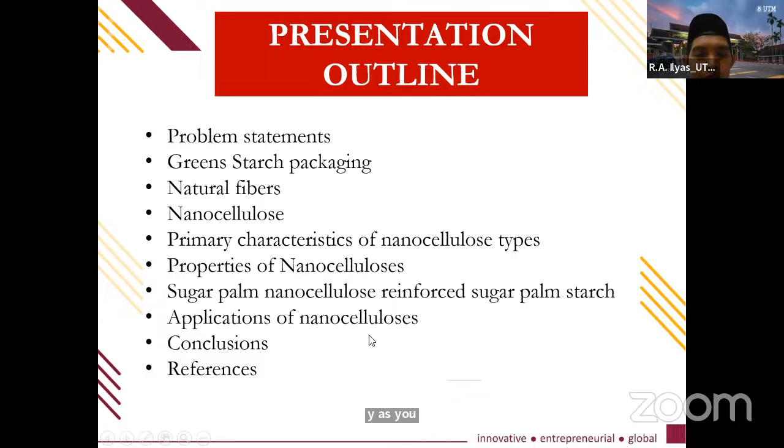This is my presentation outline, starting with a problem statement, then starch packaging, natural fiber, nanocellulose, and then primary characteristics of nanocellulose, sugar palm nanocellulose, reinforced sugar palm starch, application of nanocellulose in food packaging, conclusion and reference.

One question before I start the presentation: if one bottle of water is thrown into the sea, how long would it take to fully decompose? It will take 450 to 1,000 years to decompose.

Currently, the plastic industry uses petroleum-based synthetic polymer.

This is a mountain of plastic bags thrown in the landfill. The problem encountered is this plastic is non-degradable and non-renewable in nature. This figure shows 'don't trash where they splash,' because this turtle might think that the plastic is a jellyfish.

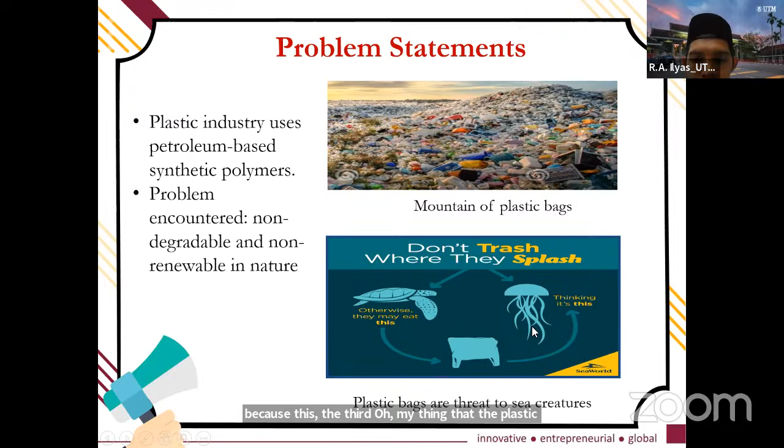How to overcome this problem: one method is we change synthetic based plastic, or petroleum based plastic, to starch biopolymer due to its availability, biodegradability, and renewability.

The starch-based film for packaging has been reported to have low water barrier resistance. Although starch can be one solution for the degradation problem of synthetic plastic, it has drawbacks: first, low water barrier resistance, and second, poor mechanical strength.

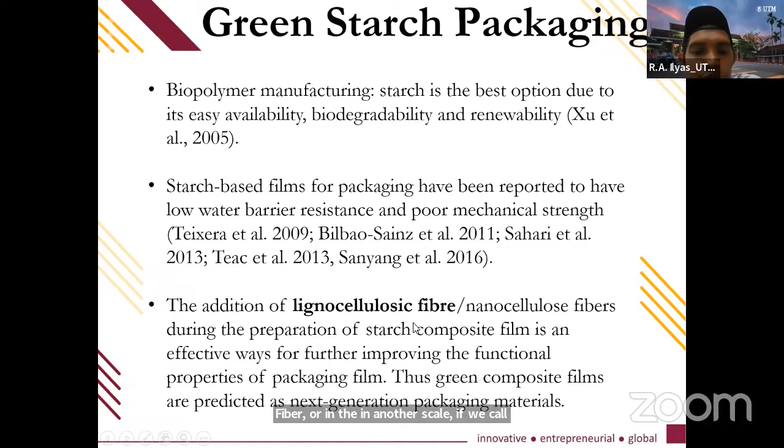In order to improve these drawbacks, we include lignocellulosic fiber, or in the nanoscale we call it nanocellulose fiber. This is a component of the biocomposite - it can be a combination of fibers and polymer.

Natural fiber can be obtained from any source, such as plants and animals. However, for this presentation, I will focus on lignocellulosic fiber.

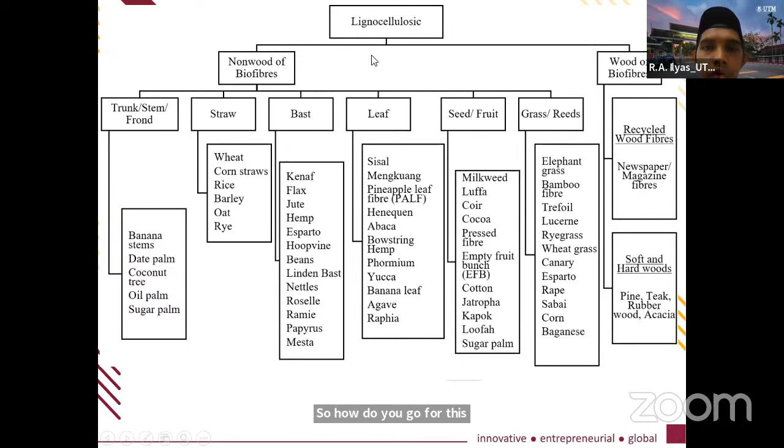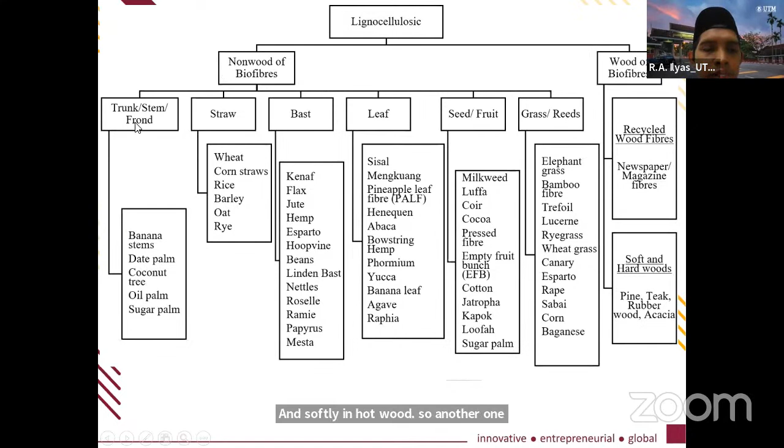Lignocellulosic fiber comes from two sources: non-wood biofiber and wood biofiber. Wood biofiber consists of recycled, softwood, and hardwood. The non-wood biofiber includes trunks, straw, bast, leaf, seed, and grass.

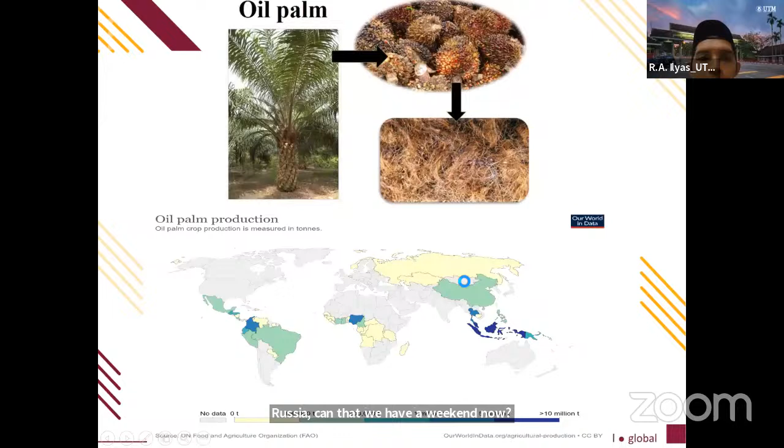This is some example natural source fiber in Malaysia, such as sugar palm, coconut, cocoa pod husk, betel nut, sugar cane bagasse, banana, pineapple, oil palm, roselle. All these fibers can be reinforced with starch to improve the mechanical and water barrier properties.

Going to the nanoscale, the nanoscale of natural fiber is nanocellulose. It can also be nanolignin, but for this presentation I will focus on nanocellulose.

Nanocellulose has a nanostructure of 1 to 100 nanometers in diameter and tens to hundreds of nanometers in length, so it's called a nanofiber.

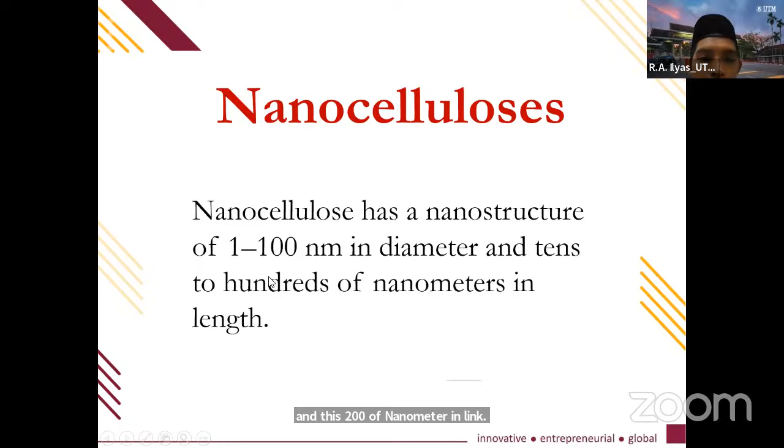For example, we can use soda pulping, acid and alkali pretreatment, and then cellulose isolation. Lignin was removed using sodium chlorite, and hemicellulose was removed using sodium hydroxide. After that, we get cellulose.

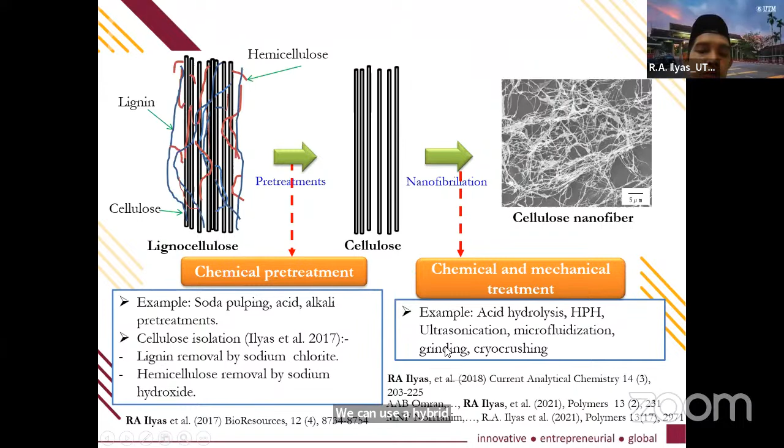We can extract the nanocellulose using chemical and mechanical treatment. Some examples: acid hydrolysis is an acid treatment. For mechanical treatment, we can use high pressurized homogenizer, ultrasonication, microfluidization, grinding, and cryo crushing. I've published several journals regarding this method to extract the cellulose.

This is the primary characteristic of the nanocellulose.

So currently we have 3 types of nanocellulose. However, from the plants, we have 2: nanofibril and nanocrystalline. So what is the difference between nanofibril and nanocrystalline?

It's the size of the fiber. You can look at the length. The length for the nanofibrillated is below 1 micrometer up to 10 micrometer. However, for the nanocrystalline, the length of the fiber is almost up to 100 nanometer. So there is a difference between the nanofibrillated and nanocrystalline.

So you can imagine the shape of the nanofibrillated and the nanocrystalline. Crystalline looks like rice. However, for the nanofibrillated cellulose, it's noodle-like.

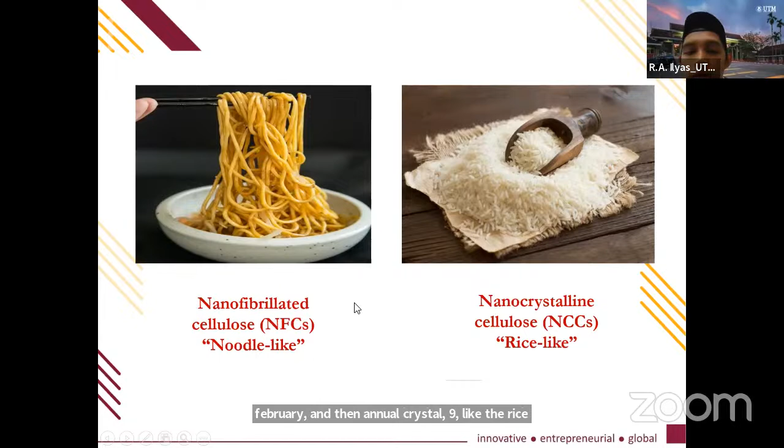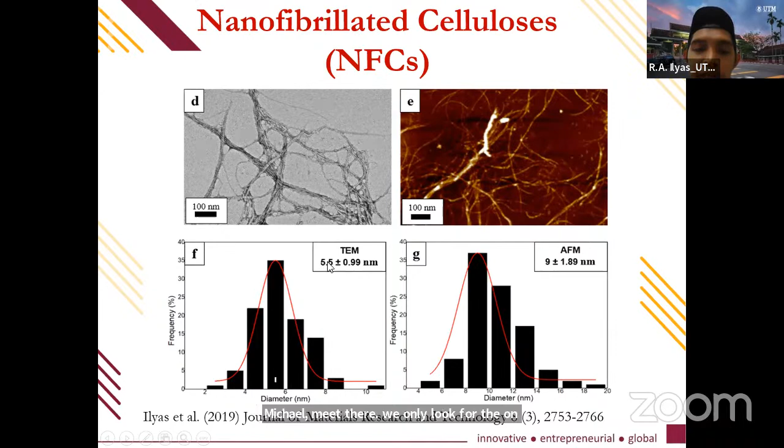And then some of the properties of the nanocellulose explain why we should reinforce it with starch. First is the high surface area, high aspect ratio, high crystallinity, low density, high mechanical strength, high tensile.

It's renewable and available as long as it is plant, and you can extract the cellulose from it. It's biodegradable, biocompatible, has high thermal stability, and besides that, it has an abundant surface of hydroxyl groups, which we can modify to reinforce with other polymers, and it's less toxic.

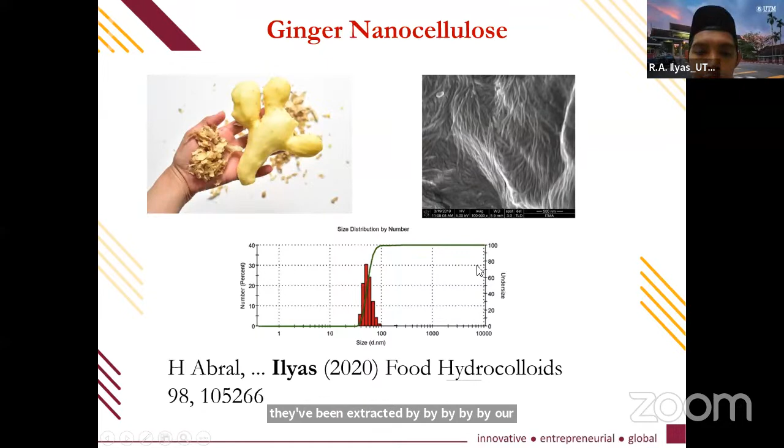Okay, this is the type of nanocellulose that have been extracted by our team. This one is ginger nanocellulose, then water hyacinth cellulose, kenaf cellulose, sugarcane bagasse nanocellulose, and agave gigante nanocellulose.

This one is out of scope, but still this bacterial nanocellulose can be reinforced with starch to increase the mechanical properties.

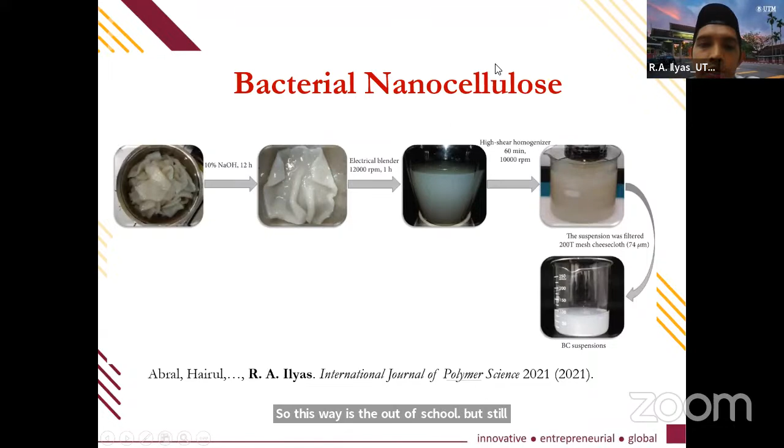So this one is the project for sugar palm nanocellulose, in which we extract the nanocellulose as well as the starch from the same tree. This one is the starch. This bioplastic starch, thermoplastic, can be used for food packaging.

Sugar palm starch, from the sugar palm fiber, can extract and become cellulose. After that, isolate the nanocellulose using chemical treatment. We get the nanocrystalline cellulose, and with mechanical treatment we can get the nanofibrillated cellulose.

So this one is the sugar palm nanocellulose reinforced with sugar palm starch. We can see that when we reinforce with only 0.5% nanocrystalline cellulose, the tensile strength increases up to 11.47 megapascal, compared to the raw starch, which is 4.8 megapascal. So it increases up to double.

Besides that, we can also see the water vapor permeability: when we include the nanocellulose, the water vapor permeability is decreasing, which means it improves water resistance.

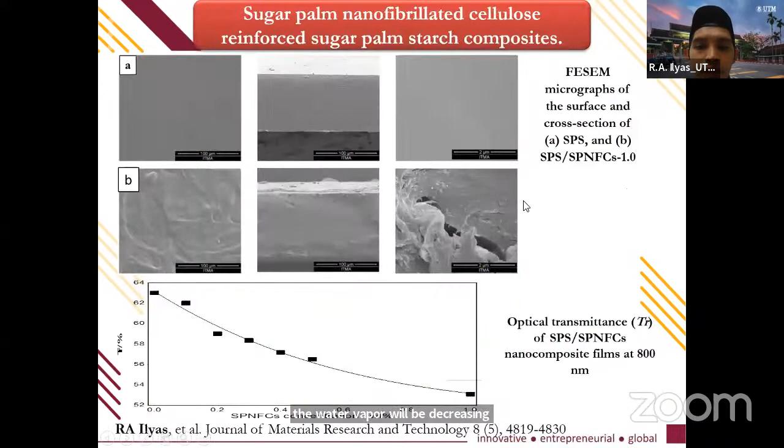And then besides that, nanofibrillated cellulose—these are different from nanocrystalline. We include 0.5% for the nanocrystalline, however for nanofibrillated cellulose we have to include 1.0%. So why is it different? It's because of the surface area of the nanocellulose.

Besides that, it also improves the oxygen barrier properties of the nanocellulose due to the tortuosity theory. When we include the fiber in the nanocellulose, we can see that the water or air needs to go through the tortuous path, or the barrier. So this is the difference.

So this research was done in 2012. When we reinforce with raw sugar palm fiber, the mechanical strength of the starch increases up to 5.5. Then we try including cellulose, 10.5. And then we include sugar palm nanocrystalline cellulose, increasing up to 11.47.

And then sugar palm nanofibrillated cellulose reinforced with sugar palm starch increases up to 10.75. However, if you see this one, it takes 30% of the natural fiber cellulose to get this tensile strength.

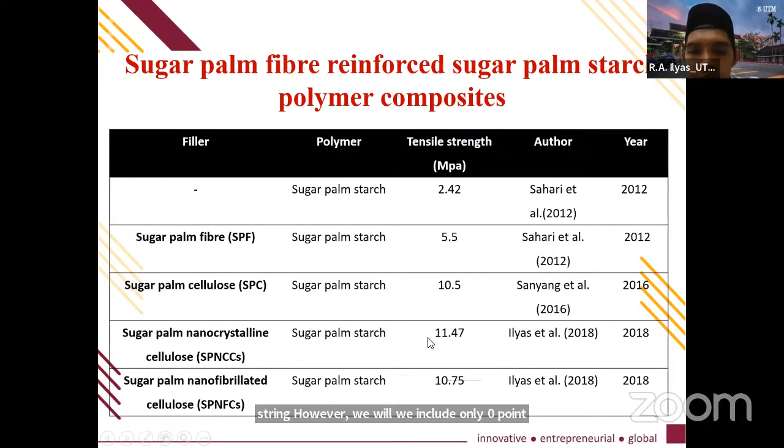However, when we include only 0.5%, we can get this type of strength. So this research can really be contributed to use in packaging applications.

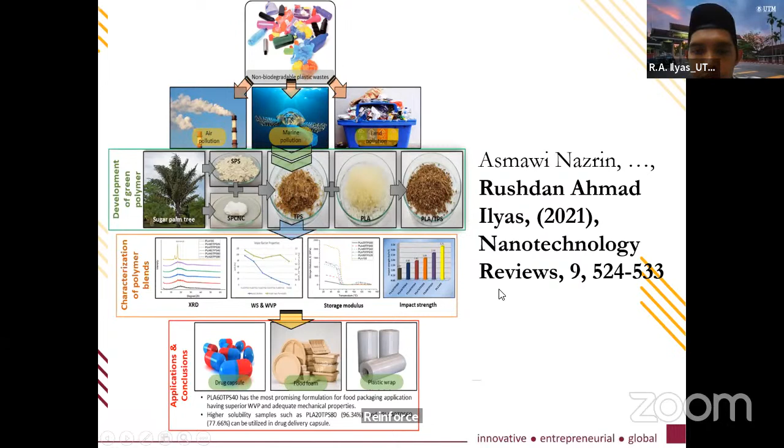And then another thing is, we also extended the research to reinforce with PLA and starch and nanocellulose. This one was published in the Nanotechnology Reviews. Besides that, we also found that after this, the mechanical strength increases.

Dr. Ilyas, I'm just interrupting you. Due to the shortage of time, you can continue for just 1 or 2 more minutes, and then so that we can... Okay.

So however, when we see that the starch is being attacked by microbes, what we do is include silver nanoparticles to make the starch antimicrobial.

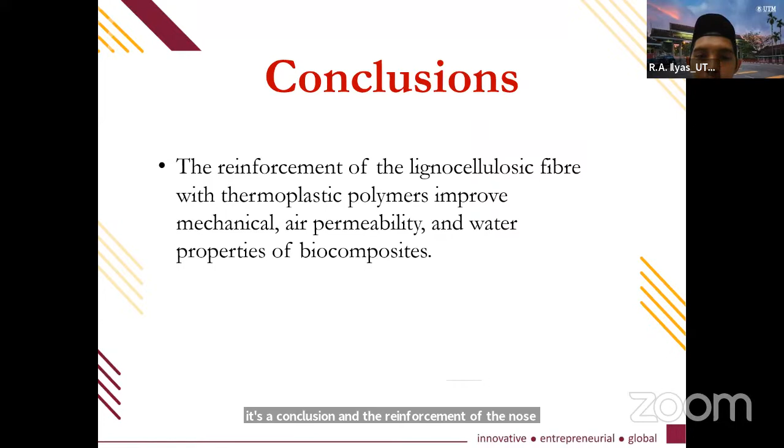As a conclusion, the reinforcement of lignocellulosic fiber with thermoplastic polymers improves the mechanical, air permeability, and water properties of the biocomposite.

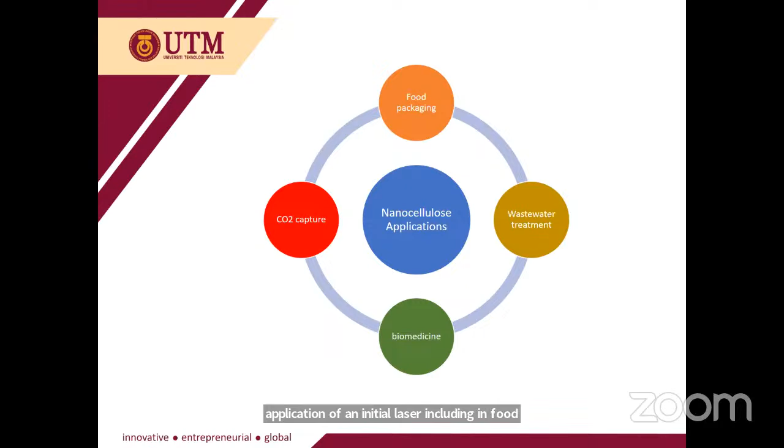In this review, we focus on the applications of nanocellulose, including in food packaging, wastewater treatment, biomedicine, and carbon dioxide capture. For food packaging, there has been an increase in demand for packaging materials which are non-petroleum based, biodegradable, pose minimal threat to the environment, and are manufactured from sustainable and renewable resources.

For example, previous studies have presented the need for biodegradable polymers to replace petroleum-based synthetic polymers as raw material for wrapping. Conventionally used synthetic polymers have an edge over biopolymers.

Biopolymers have poor barrier, thermal and mechanical properties compared to their synthetic counterparts. This limits their usage in commercial applications such as food packaging.

So in recent years, there is increased attraction towards nanotechnological applications in packaging, and nanofillers or additives with their size lying in the range of 100 nanometers. These nanofillers are used to improve the properties of polymeric materials in a composite for desired applications. Such properties of the film ensure that the packed food will last long.

Next is the application of nanocellulose in wastewater treatment. The massive amount of hydroxyl groups on the nanocellulose surface allow for the establishment of interaction with heavy metals, organic compounds, and other pollutants. Besides that, nanocellulose may function as a membrane filter that takes up microorganisms and other contaminants from polluted water. Similarly, the separation of metals like silver ion and copper ion from polluted water may be accomplished by mixing magnetic nanoparticles with cellulose polymeric matrix and using an external magnetic field.

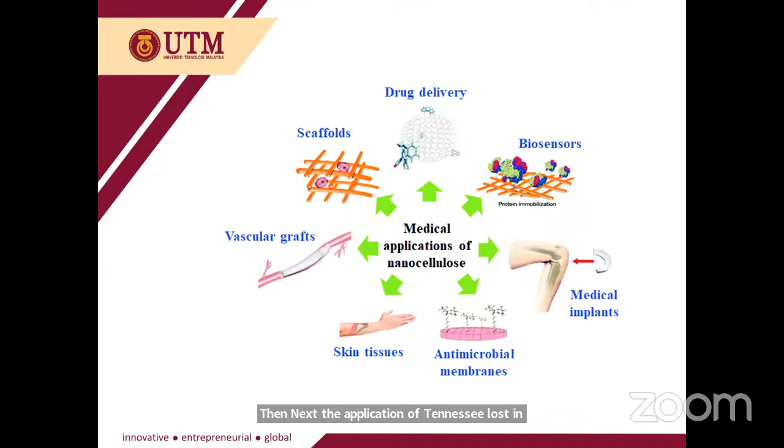Next, the application of nanocellulose in drug delivery systems. Nanocellulose can be used in drug delivery systems to regulate drug release and interaction with target molecules, enhancing the efficiency of medication administration, to connect medications and non-ionic substances with a hydrophobic nature to the nanopolymer.

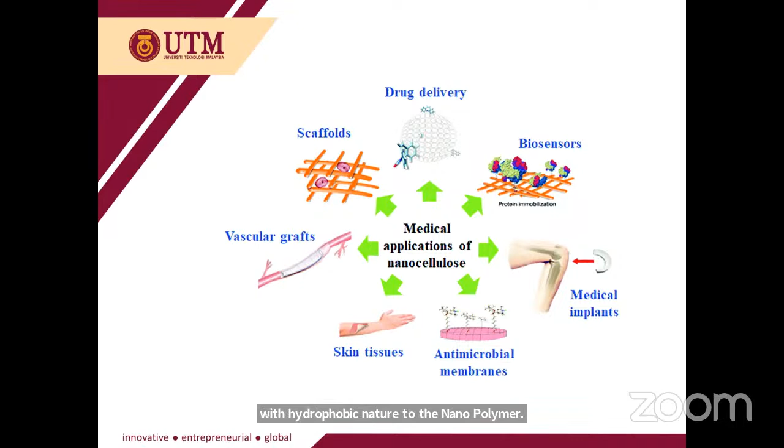Changes to the nanocellulose surface must be made. For example, according to recent studies, cationic surfactants and mechanisms of sulfonation, silation, and esterification can be utilized to adjust the negative charge of nanocellulose, increasing its hydrophobic character to promote interaction with pharmaceuticals and manage its gradual release.

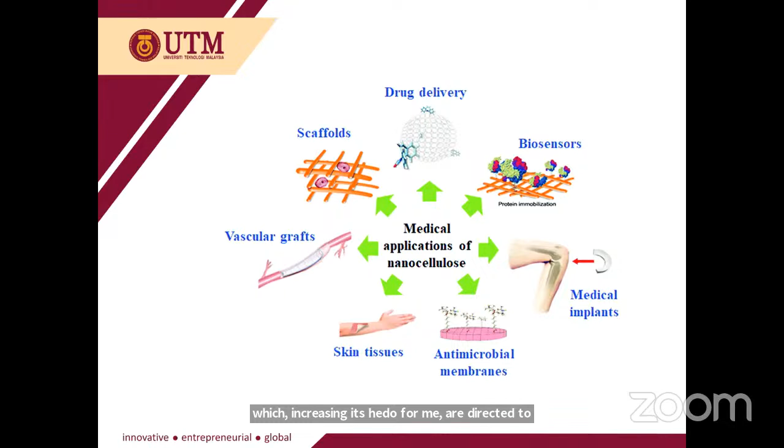This is the application of nanocellulose for CO2 capture. The incorporation of inorganic particles or chemical modification of nanocellulose are two of the primary methods for CO2 adsorption. These nanomaterials can be functionalized and used as adsorbents or as a component of membranes to selectively retain CO2.

In this way, nanocellulose has been used to participate in chemical or physical cross-linked hydrogels that may be frozen and dried to produce aerogels, such as those made from glutaraldehyde, borax, or epichlorohydrin.

By modifying nanocellulose aerogel with silane, CO2 can be collected through a chemisorption mechanism. Aerogel fabricated from nanocellulose impregnated with a suspension of functionalized crystalline nanocellulose was proven to be used for physisorption-based CO2 retention. So in conclusion, since nanocellulose is renewable, biocompatible, and biodegradable, it has many appealing applications.

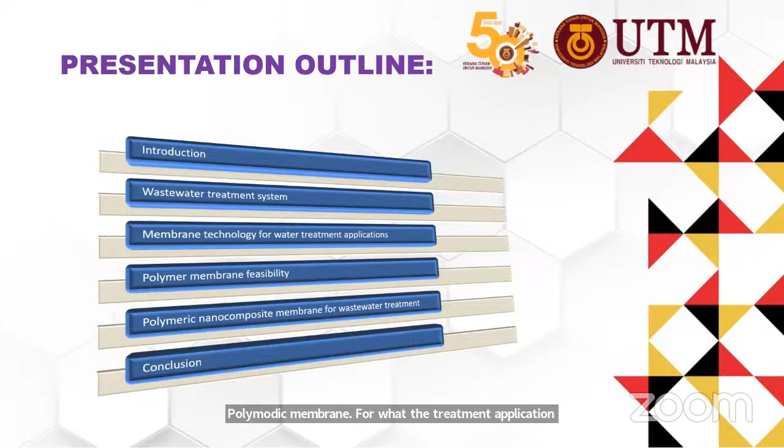This is my presentation outline. First, introduction, then wastewater treatment system, membrane technology for water treatment application, then polymer membrane feasibility, and then polymer nanocomposite membrane for wastewater treatment, and conclusion.

Most developing countries are confronted with the problem of water pollution, which is a key worry that must be addressed to ensure people's well-being. Water pollution occurs when there is a change in physical, chemical, and biological properties from its original state that exceeds the limit and standard set as contained in the water quality standard. In general, the pollution is caused by human activities that have adverse effects on the environment, such as health, living resources, ecological system, and others.

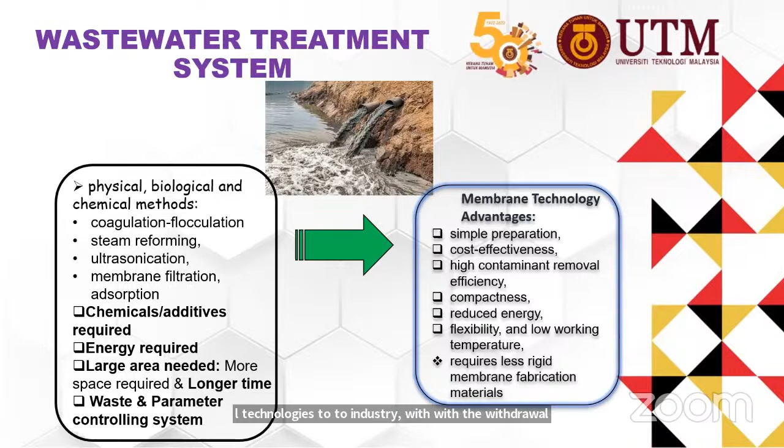Thus, membrane separation technology is one of the potential technologies to treat industrial wastewater without disturbing the environmental balance, and porous membranes have been widely used for water separation processes.

Generally, a membrane can be identified as a thin layer of semi-permeable material which separates substances and allows one part of a mixture to permeate the membrane while inhibiting the other when a driving force is employed. Up to now, there are four different pressure-driven membrane types used in water and wastewater treatment, namely microfiltration, ultrafiltration, nanofiltration, and reverse osmosis, based on the membrane pore size and operating mechanism.

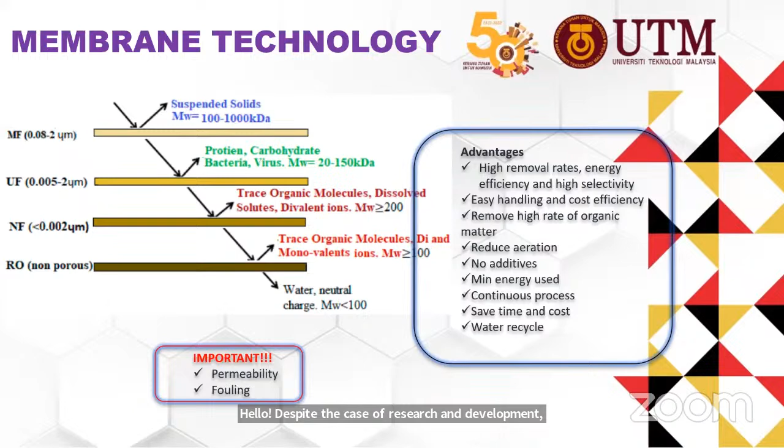However, despite decades of research and development, membrane filtration remains plagued by long-standing operational issues, which are permeability and fouling. So some modifications have been made to achieve the best membrane separation process.

Many membranes are used in wastewater treatment, either commercial membrane, inorganic, polymeric and organic polymer composite, and then nanomaterial and hydrophilicity material.

The other modifications are by using fabrication methods, which include molding, solution casting, sintering, stretching, coating, electrospinning method, and phase inversion.

Modifications have been made to the membrane material due to the properties of wastewater, which is oily, colored, containing organic matter, textile and pharmaceutical waste, and heavy metals. So numerous studies have been devoted to development of antifouling membranes by improving membrane surface smoothness, charge, and hydrophilicity. This can be achieved by selective material, polymer material, and modifying the membrane surface properties.

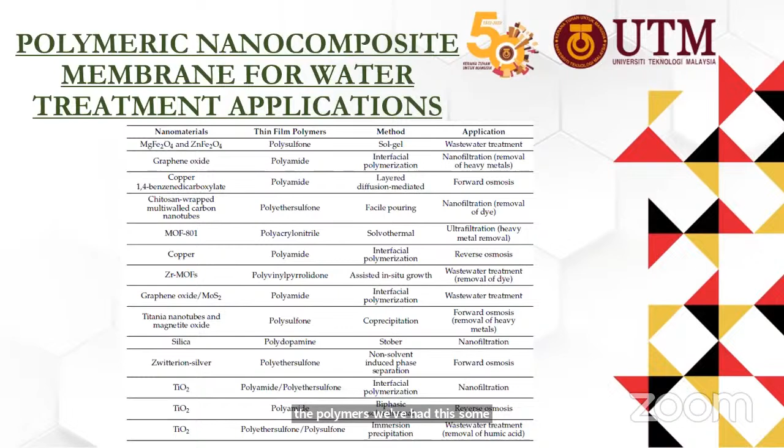This is a polymeric nanocomposite membrane used in water treatment application. So many types of nanomaterials are combined with polymers, with various methods used for water application.

As a conclusion, the membrane materials, shape, cross-section, and fabrication method have primarily attributed to the performance of the membranes. The utilization of some polymeric materials and preparation methods affect the permeability, selectivity, and rejection of membranes for wastewater treatment applications. That's all from me.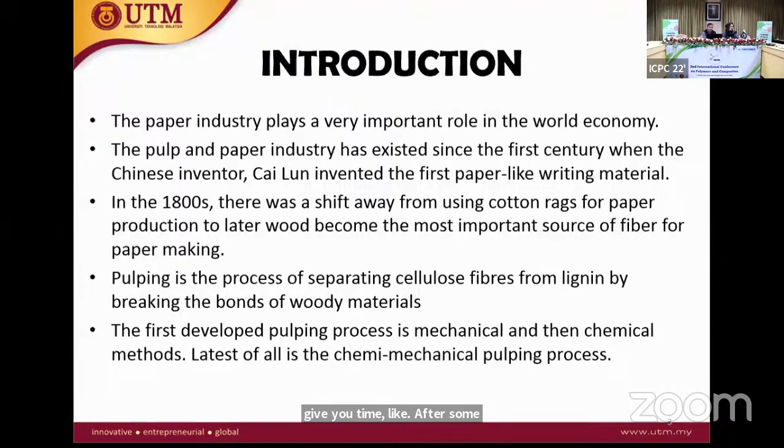Do you hear me here? Yes, yes, we can see your screen and we can hear you also. Sorry for the inconvenience. So pulping is the process of separating cellulose fibers from lignin by breaking the bonds of the woody material. The first developed pulping process was mechanical, which is the stone ground wood pulp process, developed by German chemists, followed by the evolution of the chemical method, and last of all the chemical-mechanical pulping process.

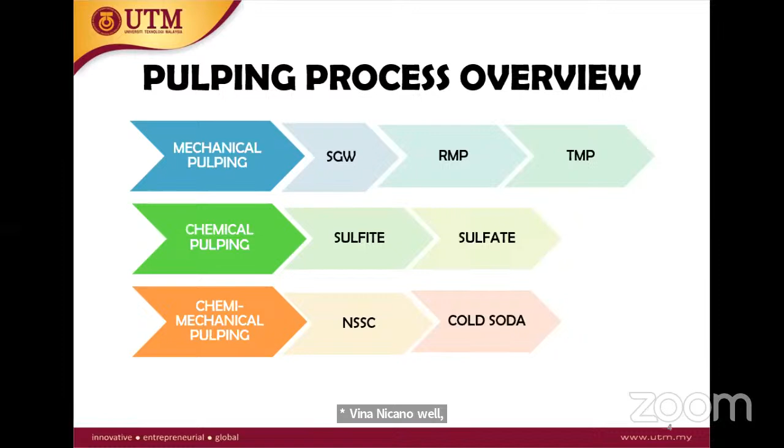For the pulping process overview, I start with mechanical pulping, which has three types: first is the stone ground wood pulp process, second is refiner mechanical pulp (RMP), and third is the thermomechanical process. Chemical pulping consists of the sulfite and the sulfate processes. For chemi-mechanical pulping, I will cover NSSC, the neutral sulfite semi-chemical process, and the cold soda process.

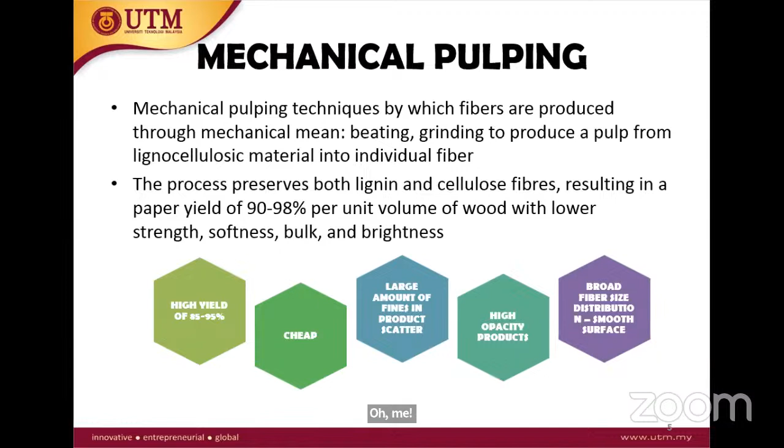For mechanical pulping, fibers are produced through mechanical means, consisting of beating and grinding to separate lignocellulosic material into individual fibers, caused by physical means. The process preserves both lignin and cellulose fibers, resulting in a paper yield of 90 to 98% per unit volume of wood, with lower strength, softness, bulk, and brightness. The benefits of mechanical pulping are high yield and lower cost, large amount of fines, and high opacity product with broad fiber smooth surface paper. The stone ground pulping process is considered low cost and produces paper with high absorbency. All mechanical pulping involves pressing materials into a rotating grindstone with speeds ranging from 1000 to 1200 revolutions per minute.

The grindstone abrasion force tears the wood into fine fibers, and the fiber fragments are continuously washed from the grindstone by a water shower. The friction in the grinding zone raises the temperature, softening the wood and facilitating fiber separation. This is where heat is produced, softening the lignin and lowering fiber damage.

The refiner mechanical process consists of shredding and grinding wood chips between rotating metal discs or plates. It was created in the 1950s to improve paper quality. It consists of two stages: the first involves defibration of the wood, and the second involves loosening the fiber structure to increase fiber flexibility.

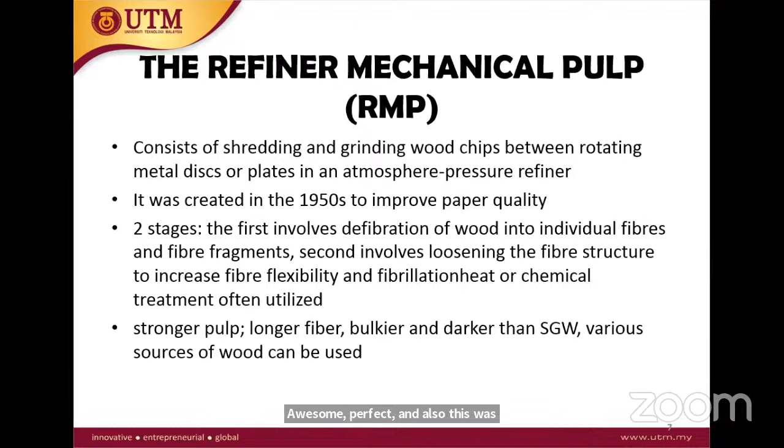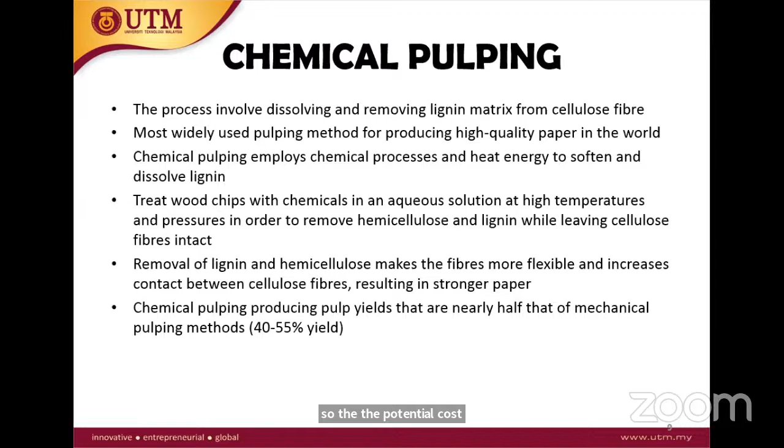Next is sulfate or kraft pulping. This process involves dissolving and removing the lignin matrix from the cellulose fiber, similar to the previous one. The cooking chemicals used are NaOH and sodium sulfide. This process usually needs bleaching to make white pulp, as the pulp remains brown even after finishing the process. It produces longer fiber and stronger paper, but the yield is quite low, only about 50%.

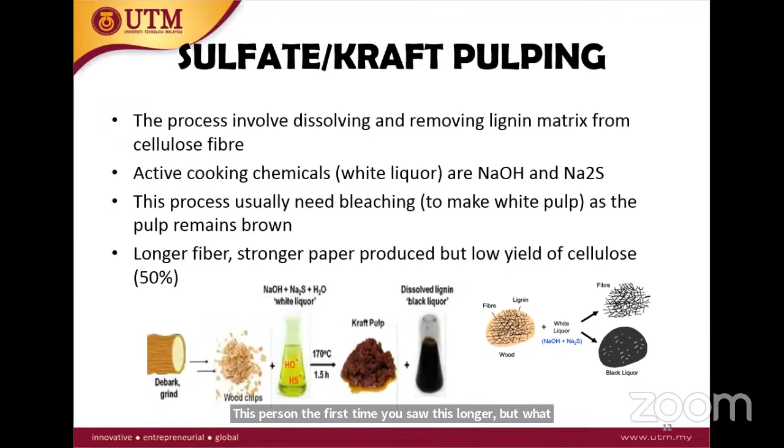Soda pulping is the treatment of wood chips with sodium hydroxide solution. The temperature usually ranges from 20 to 30 degrees Celsius prior to disc refiner defibration. It is frequently combined with the kraft process in order to achieve sodium hydroxide recovery. This process takes only 1 to 2 hours to impregnate the wood chips during cooking, which causes fiber swelling and prevents polyose loss.

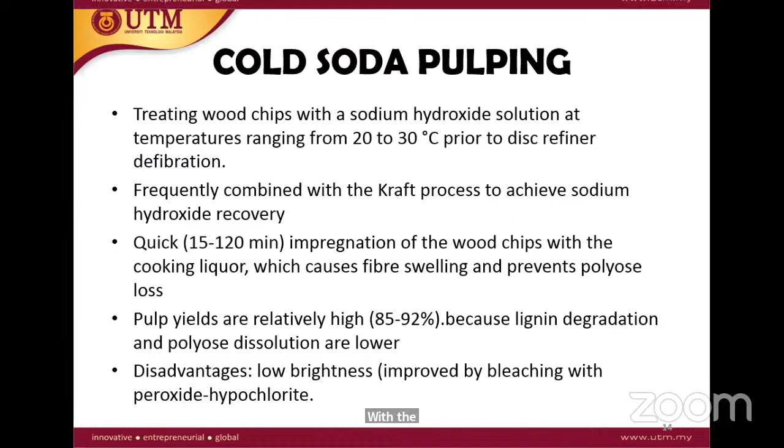This is quite new, actually, maybe for me. Cellulose and lignocellulose have great potential as nanomaterials and are also abundantly renewable. A wide range of paper and packaging industries have already incorporated nanotechnology throughout the production system.

So in conclusion, mechanical treatment can isolate the individual fibers in different ways, but chemical treatment can modify the chemistry of the paper surface itself.

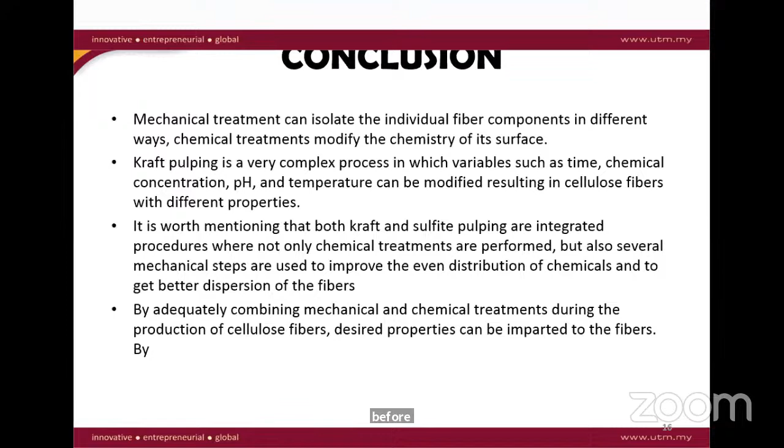So by adequately combining mechanical and chemical treatment throughout the production of cellulose fiber, desired properties can be imparted to the fiber. So these are some of my references. And that's all for me.

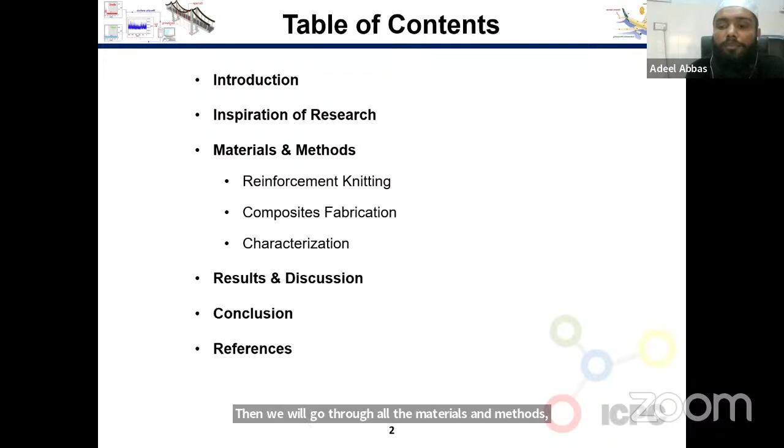First of all, introduction: composites are the macroscopic or microscopic combination of two or more different materials. Generally, the matrix and reinforcements are the two phases. In fibrous composites, we generally use fibers, yarns, and nonwoven materials as reinforcing material, and our continuous phase is epoxy or some other resin as per requirement.

The second main aim of our research is the smart feature of composites, also called self-diagnostic properties. This is the ability of material to sense any mechanical, thermal, or chemical changes in their structure, which can be induced using intelligent devices, piezoelectric materials, and nanomaterials.

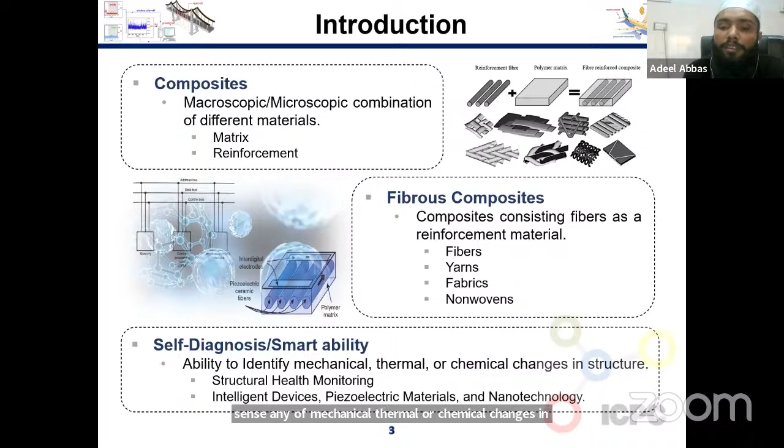Fiber reinforced composites are always an integral part of complex infrastructure, so health monitoring is always necessary to keep the system running smoothly. For example, in an advanced Boeing there is 50% composite content, and in bridges and other complex infrastructures, composites are an integral part. So it is necessary that there be smart features or self-diagnostic abilities in composites to monitor their health in real time.

There are some researches that use acoustic sensors, fiber Bragg grating sensors, and piezoelectric transducers to check the smart ability of composites or induce self-diagnostic properties. But there isn't still any significant use of knitted reinforcements for self-diagnostic properties induction. Hence, this work will focus on developing knitted reinforcements to induce self-diagnostic properties in composites for their structural health monitoring.

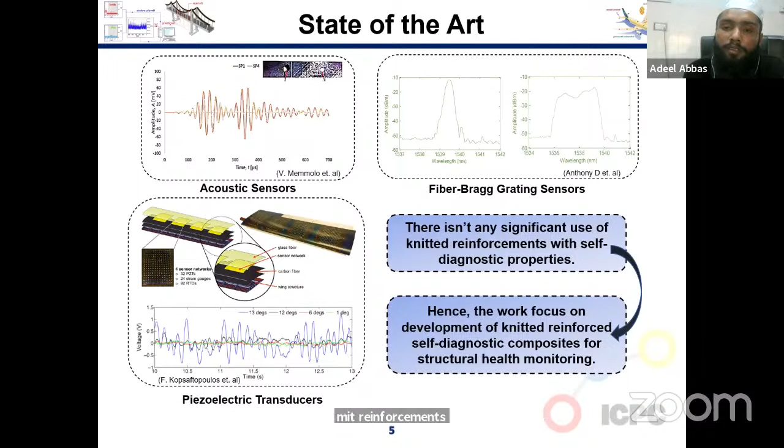Firstly, for reinforcement knitting, a specialty knitting structure was used that included an inlay yarn and a base pattern. Carbon fiber, being a conductive material, was used as the inlay yarn, and the base knitting material was polyester yarn. The patterns used were 3x1 and 6x1 inlay patterns, which we will see further in the slides.

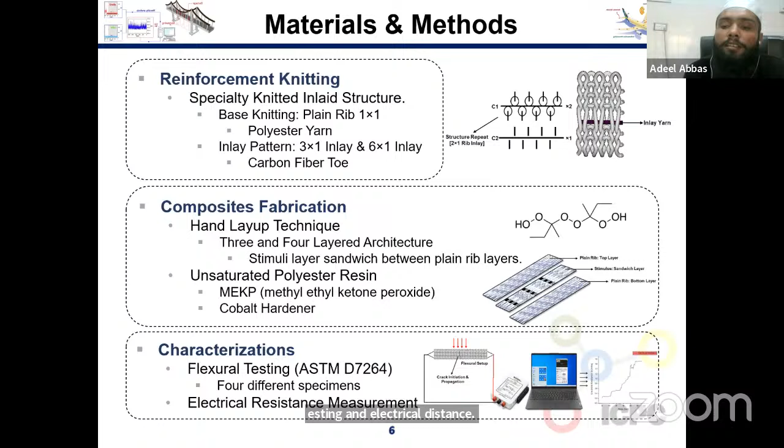For composite fabrication, a hand lay-up technique was used, and unsaturated polyester was used as resin. There were two different inlay patterns and two different stacking sequences, so overall there were 4 specimens. For characterization, we used electromechanical characterization with flexural testing and electrical resistance measurement simultaneously, so we could observe the composite's behavior under mechanical loading in terms of electrical resistance.

After flexural characterization, simultaneously observing the mechanical and electrical resistance characteristics with respect to test time, there is a linear increase in flexural strain, and electrical resistance is also fluctuating with respect to the strain. Increasing strain has a positive impact on electrical resistance, which also increases. Initially with crack propagation there is a small change, but after a major crack there is an exponential increase and resistance goes up to a critical value.

When there is strain hardening in the composite, termed as relocating of bonds, electrical resistance again decreases. We can see from the graph that at the critical resistance value, our composite has lost its health, as indicated by the fractures in the figure. So it is time to replace the composite.

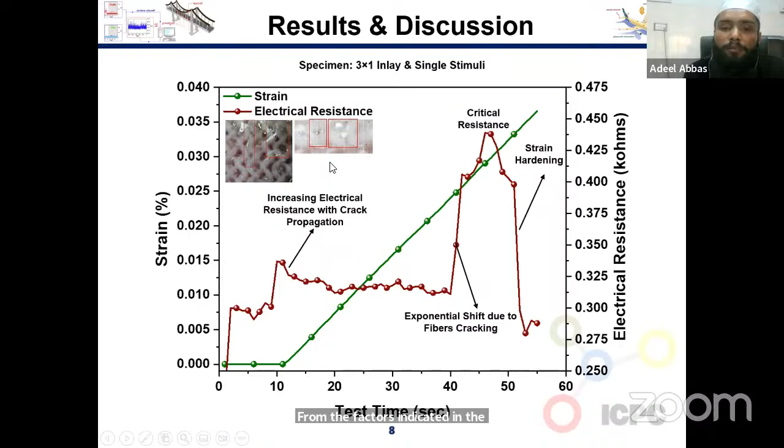Comparing electrical resistance values of both 3x1 and 6x1 inlay patterns, we can clearly see that the electrical resistance of the 3x1 specimen is more linear compared to the 6x1 specimen. During the initial test time, there isn't any specific fluctuation in electrical resistance, depicting that our 6x1 inlay pattern isn't capable of monitoring the health of the composite.

In case of 3x1 inlay, the initial linear increase can be observed, showing that the composite is smarter compared to the 6x1 inlay. Our 3x1 inlay composite is capable of sensing its health during the strain hardening region, while for 6x1 inlay there isn't any strain hardening region, and electrical resistance abruptly stops at the out-of-limit value.

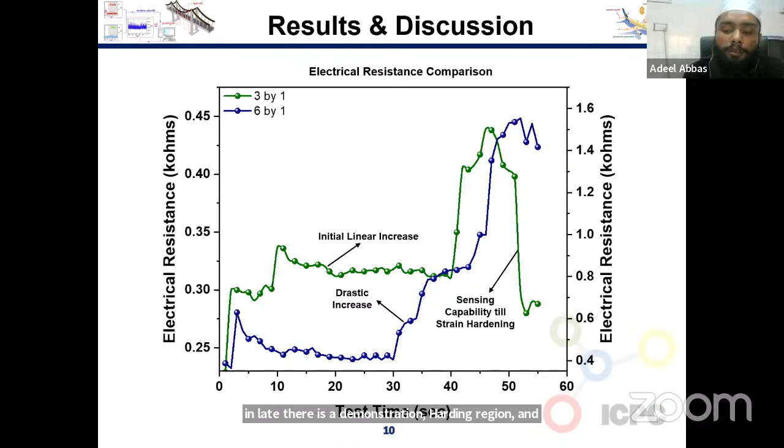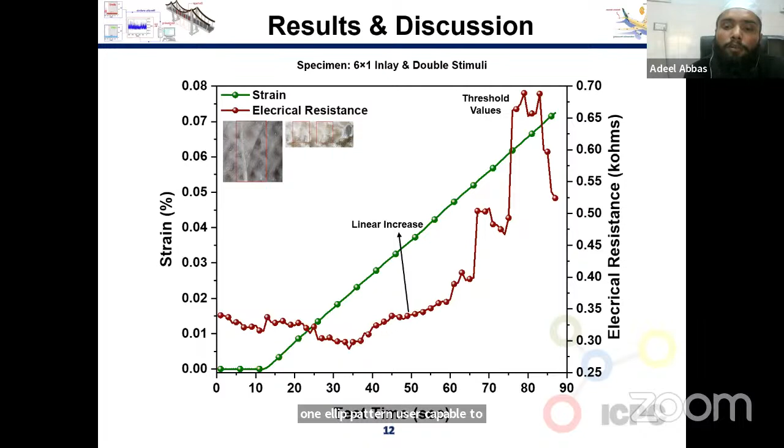Similarly for the 6x1 inlay pattern with double stimuli layer, we see only a linear increase—there isn't any initial fluctuation or decrease in electrical resistance, following the pattern previously described for the single stimuli 6x1 composite. This shows that the 6x1 inlay pattern isn't capable of sensing composite health properly due to the lower amount of carbon inlaid yarns.

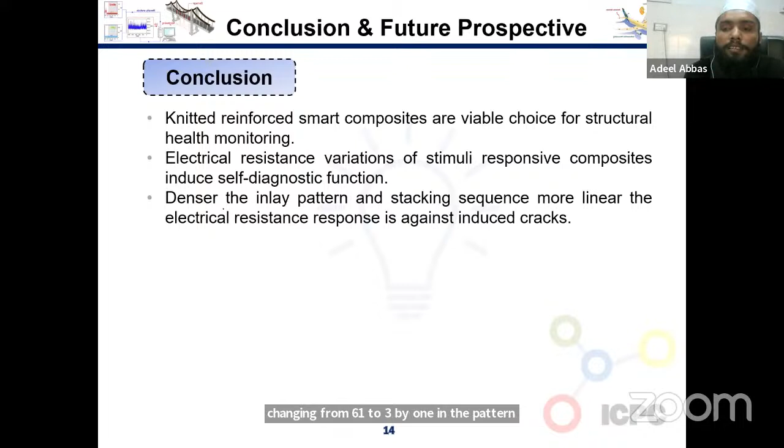From the results, we conclude that knitted reinforced smart composites are a viable choice for structural health monitoring, and can sense mechanical changes in composites with respect to their electrical resistance. Making our inlay pattern denser—for example, changing from 6x1 to 3x1 inlay pattern and making the stacking sequence more dense—results in a linear increase in electrical resistance against mechanical damages.

For future perspectives, we can develop knitted reinforced composites with self-diagnostic function and sound-based alarming systems. Practically, these can be integrated into running systems to check their reliability.

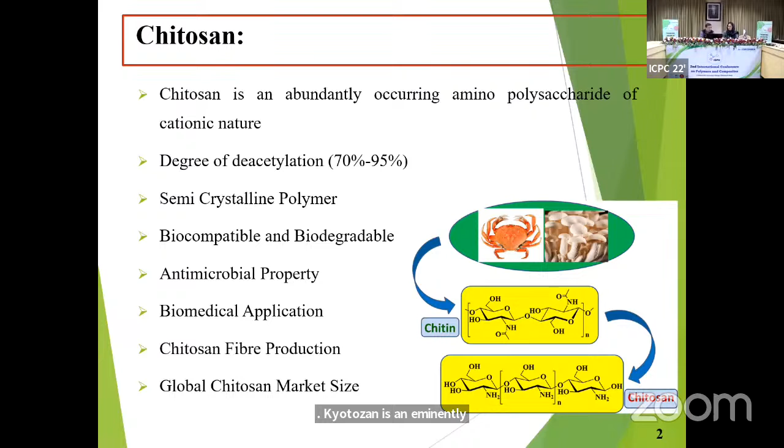Chitosan is an abundantly occurring amino polysaccharide of cationic nature, based on chitin. Both chitin and chitosan are found abundantly in nature from a number of natural renewable resources. The main source of chitin is skeletal materials of sea creatures, including crabs, prawns, lobsters, and shrimps.

Chitosan is highly molecular and is composed mainly of monomers linked D-glucosamine and N-acetyl-D-glucosamine. The ratio between D-glucosamine and N-acetyl-D-glucosamine is the degree of deacetylization, which is really important in terms of chitosan. The acylated units have typical degree of deacetylation between 70 to 95% and molecular weight which varies between 10 to 1000.

Furthermore, it is also a non-toxic, biodegradable and biocompatible polymer. Various studies have shown that chitosan possesses antimicrobial effect against bacteria, fungi, and viruses.

The cationic amino group carried by the C2 position of glucosamine units of chitosan are responsible for the formation of polyelectrolyte complexes with anionic groups and different polyanions like carboxylic acids, alginate, xanthan, carrageenan, carboxymethyl cellulose, pectin, and polylactic acid.

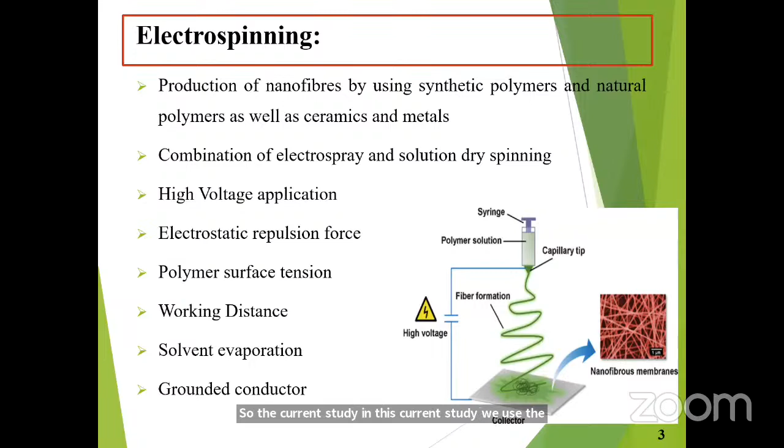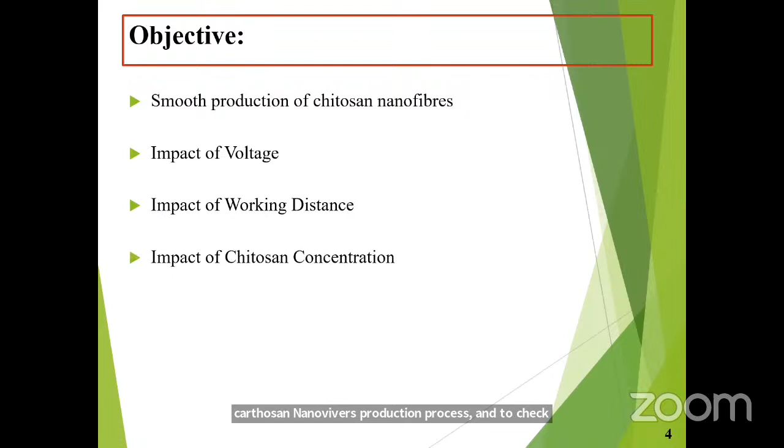Now let's talk about the main objective of this study. Our main objective was to achieve smooth production of chitosan nanofibers, with beads-free formation. Secondly, to check the impact of voltage on the chitosan nanofiber production process, and to check the impact of working distance on the resultant nanofibers. The fourth objective was the impact of chitosan concentration on the resultant nanofibers, and lastly, to obtain the maximum possible concentration of chitosan in the resultant nanofibers to achieve the desired application in filtration, packaging, and medical application.

In terms of methodology, we used chitosan as the main polymer, polyethylene oxide as a co-spinning agent, and 50% glacial acetic acid as a solvent. The electrospinning setup was used to produce nanofibers with voltage ranging from 15 to 20 kV, with two working distances of 10 centimeters and 15 centimeters.

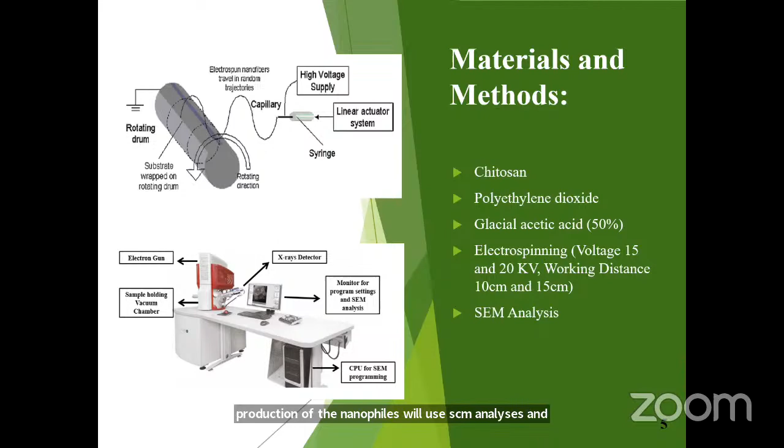To analyze the efficacy of the process and the production of the nanofibers, we used SEM analysis, and the model used was the TESCAN MIRA 3 GMUVP Analytical FE-SEM. In this section, we'll discuss the results and the key findings as well.

Samples N1 and N2 were produced at 15 kV while keeping the working distance at 15 centimeters and 10 centimeters respectively, while samples N3 and N4 were produced at 20 kV at the same two working distances. We concluded that the 1% solution smoothly produced chitosan nanofiber.

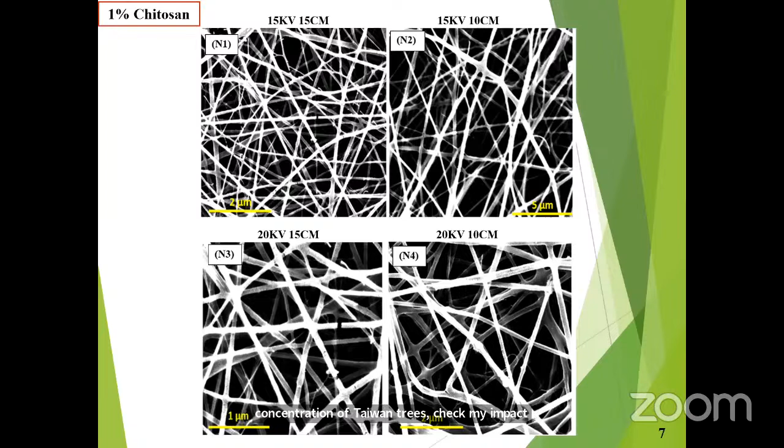So we proceeded by enhancing the concentration of chitosan further to check the impact of higher concentration on nanofiber production. Similarly, we tried a 2% chitosan solution concentration, which also showed smooth, bead-free nanofiber production.

In terms of 3% chitosan solution, the same results occurred. All four samples with 3% chitosan solution showed smooth nanofiber production without beads.

After that, at higher concentrations of 4% and above, solution wastage was high and the electrospinning process was unsuccessful due to the cohesive nature and high viscosity of the resultant chitosan solution. Furthermore, high concentration of chitosan increases the amount of strong hydrogen bonding between amine and hydroxyl groups of chitosan molecules and hinders the flow of the polymer solution, which yields unspinnable results.

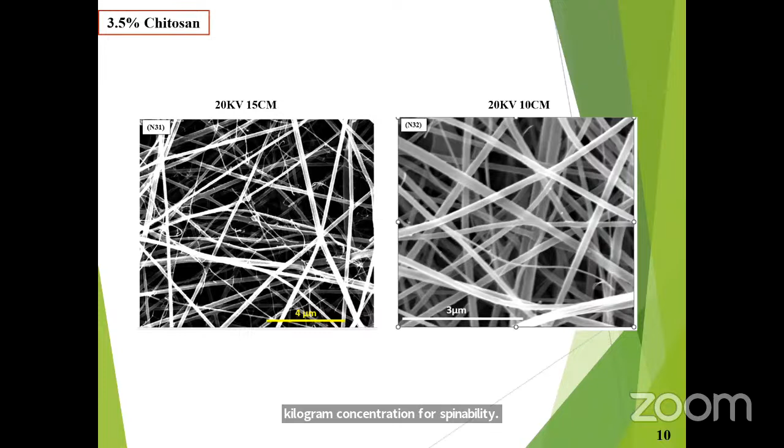Therefore, we further optimized the experimental design and tried to get results using 3.5% chitosan concentration for spinability. When we tried 3.5% chitosan concentration, we got successful results as shown in samples N31 and N32.

Smooth nanofibers were produced, and 3.5% was the maximum concentration of chitosan we achieved while keeping the other process parameters constant. These were used for further application in filtration and packaging material production.

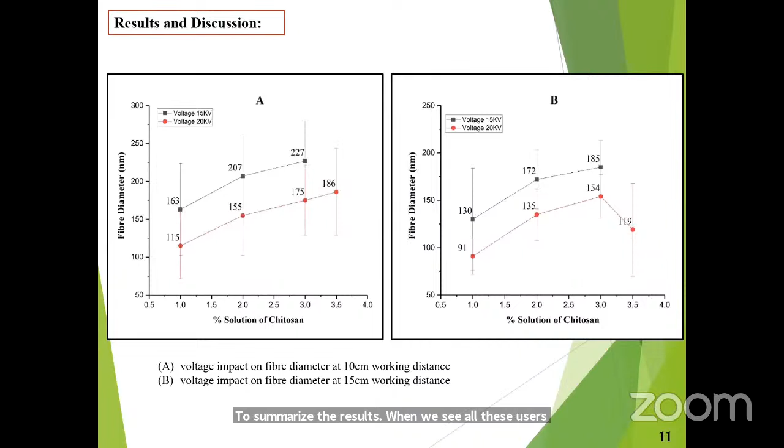To summarize the results in two graphs: graph A shows the impact of voltage at 10 centimeters, and graph B shows the impact of voltage at 15 centimeters. The trend is the same—when we increase the voltage, finer fiber is produced. The red line shows finer fiber produced at 20 kV voltage, and the black line shows coarser fiber diameter produced at 15 kV voltage compared to 20 kV.

In general, a longer working distance promotes higher draft in the polymer jet during electrospinning. However, bending instability of the jet in the presence of an electric field is also very important in this phenomenon. Therefore, a longer working distance accounts for higher whipping instability of the jet and is responsible for the reduction of fiber diameter due to acceleration and higher stretching before deposition on the collector. As a result, fiber diameter reduces with increasing working distance.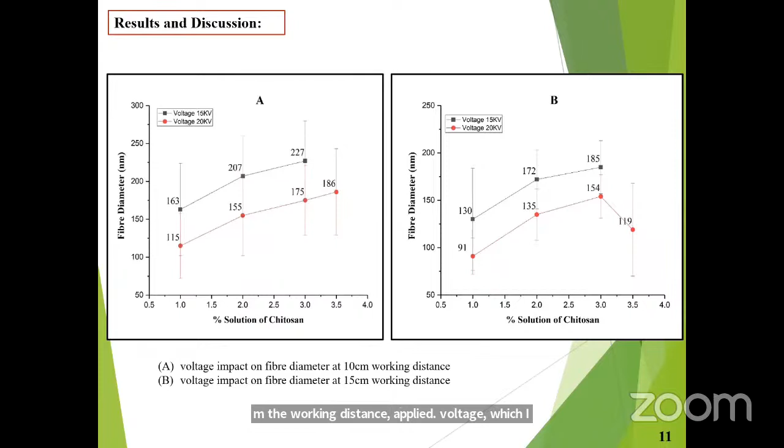Apart from working distance, applied voltage, which I already explained, is also really important to study regarding nanofiber morphology. Results show that the average fiber diameter of chitosan nanofibers was also reduced with increasing applied voltage from 15 kV to 20 kV, while keeping the other process parameters and working distance constant.

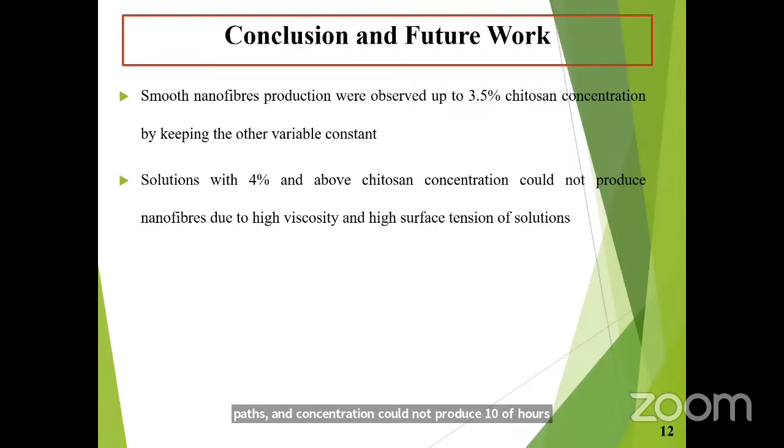In conclusion, smooth nanofiber production was observed up to 3.5% chitosan concentration while keeping other variables constant. Solutions with 4% and above chitosan concentration could not produce nanofibers due to high viscosity and high surface tension of the solution. In terms of voltage and working distance, higher voltage and longer working distance develop finer diameter nanofibers in all samples.

For future work, needleless electrospinning process is gaining attention from researchers to further optimize the process for commercial viability. Another perspective for future work is the commercial viability of producing nanofiber-coated functional clothing for research, innovation, and commercial production and utilization.

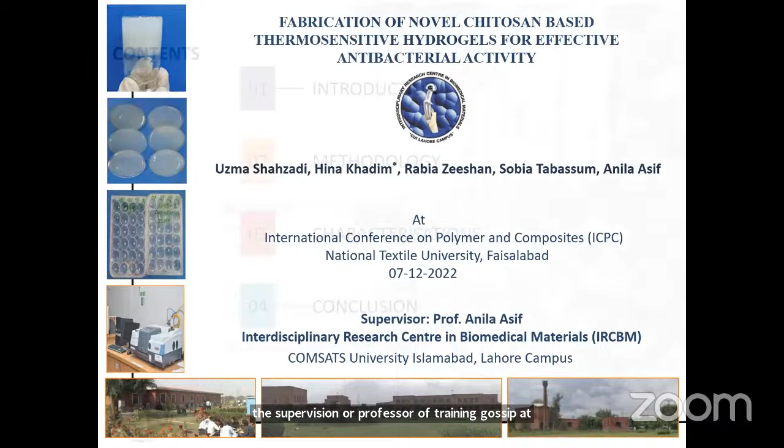The title of the paper is Fabrication of Thermosensitive Hydrogels for Effective Antibacterial Activity. I'm from COMSATS Islamabad Lahore campus, working under the supervision of Professor Dr. Anila Asif at Interdisciplinary Research Center in Biomedical Materials. My presentation will cover: introduction, methodology, characterizations, and conclusion.

Let's move towards introduction. I'll introduce biomaterials. Biomaterial is a substance that can be engineered to interact with biological systems for some specific medical purpose, following the process of tissue engineering.

Tissue engineering is a field that uses a combination of cells, engineering methods, and materials to restore and replace biological tissues. Biomaterials are used as prosthesis, meaning implants in various regions of the human body, such as joint and hip replacement, heart valve and blood vessel prosthesis, cochlear replacements, contact lenses, dental implants, and skin repair devices.

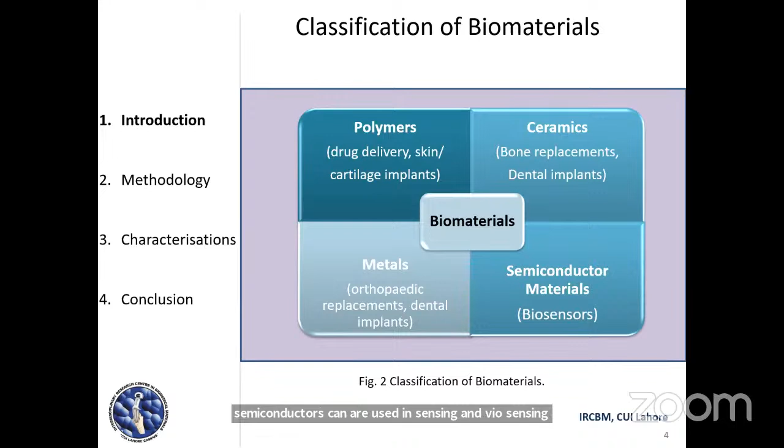There are various types of biomaterials, classified based on polymers, ceramics, metals, and semiconductor materials. Polymer-based biomaterials have applications in drug delivery, skin, and cartilage implants. Ceramic-based biomaterials are used as bone replacements and dental implants. Semiconductors are used in sensing and biosensing applications, while metal-based biomaterials are used as orthopedic replacements and dental implants.

Next, we have hydrogels. Hydrogels are three-dimensional cross-linked polymeric structures. They have the ability to absorb and retain large amounts of water because they have hydrophilic functional groups capable of holding wound exudate, and hence they promote moist healing.

Moist healing is very much essential and is good as compared to dry healing, because in moist healing cells and tissues have more way for migration compared to dry healing. Hydrogels have applications in wound healing, drug delivery, cartilage filler, and biosensing.

Moving towards my application: wound healing. Wound healing is the ability of the damaged tissue to repair itself. There are various types of wounds.

First one is first degree burn, where the uppermost layer of the skin, the epidermis, ruptures. In second degree wound, the dermis is affected, and in third degree wound, the hypodermis and whole of the muscle get damaged.

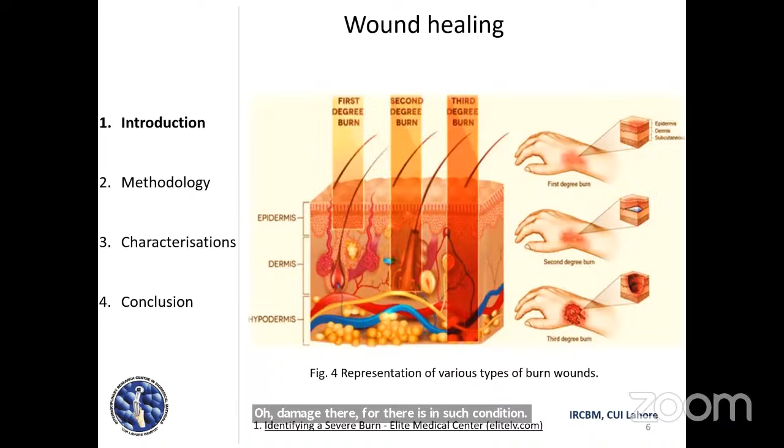Therefore, in such conditions there is an instant need to cover the wound area, and keeping in view the significance of such a wound, this area needs to be addressed.

Now we have the methodology. Here is the schematic route for the synthesis of chitosan-based polylysine hydrogels. Chitosan solution was prepared in HCl, followed by the addition of the active ingredient.

Then beta glycerophosphate was prepared. Both solutions, chitosan and beta glycerophosphate, were kept on a hot plate in an ice bath to maintain the temperature. Beta glycerophosphate was then added dropwise to the chitosan solution, and then pH was noted.

The mixture was then transferred onto a water bath at 37 degrees Celsius, and gelation time was noted. This led to the formation of the hydrogel.

On the basis of this mechanism, two distinct compositions of hydrogels have been synthesized: one is 15% and the other is chitosan-based polylysine at 20%. The difference is in the content of the active ingredient.

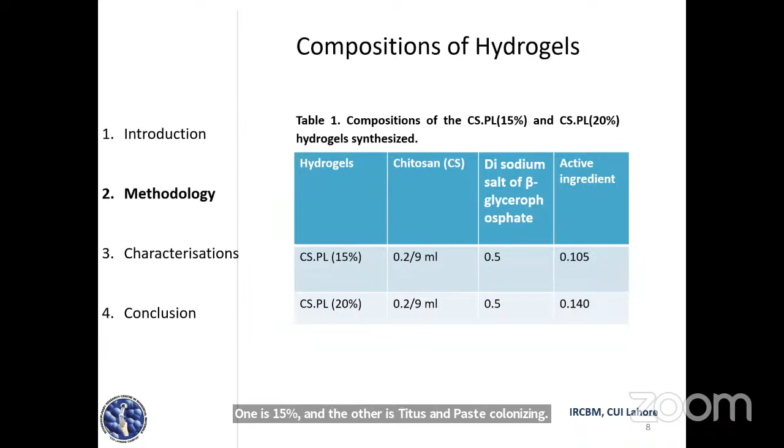Next, we have gelation time. We determined the gelation time by the inverted tube method. Hydrogel solution was shifted from 4 to 37 degrees into a glass vial. The glass vial was tilted after every minute, and the flow of the hydrogel was observed with the naked eye. The gelation time was noted until the hydrogel stopped flowing.

In this hydrogel formation, glycerophosphate played a major role in the cross-linking. When glycerophosphate was added, it increased the hydrogen bonding and decreased electrostatic repulsion between the chitosan chains.

Phosphate groups of beta glycerophosphate developed electrostatic interaction with the amino group of chitosan, and enhanced the interchain hydrophobic interactions between chitosan polymer by interacting with hydrated water molecules of chitosan.

At low temperature, chitosan contained water of hydration due to the presence of hydrogen bonds between the hydroxyl groups of chitosan and highly polar water molecules. When temperature was increased, the hydrogen bonds broke, and the rotational and vibrational energies of the hydrated water molecules increased, leading to a decreased ratio of hydrogen bonding.

These factors favored the removal of hydrated water by glycerophosphate from chitosan chains easily. Thus, hydrophobic interactions of dewatered segments of chitosan dominated, leading to thermosensitive hydrogel formation.

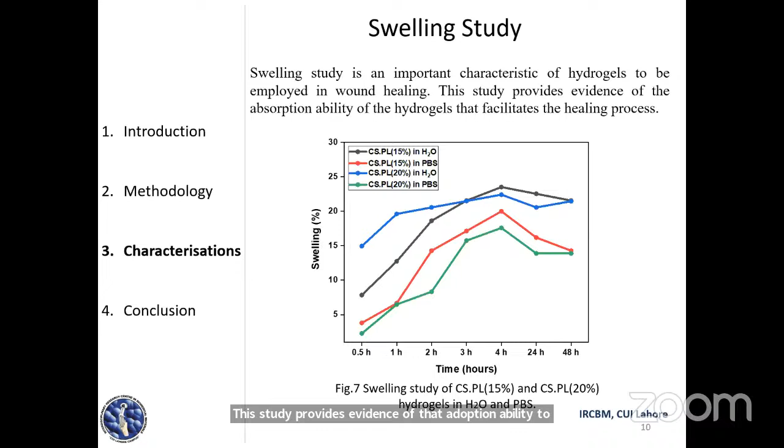The swelling study was done in two media: water and PBS. The swelling ratio, as shown in the graph, increased as the PL content increased due to the hydrophilic groups of the active ingredient.

This is in case of water, and in case of PBS, the maximum percentage is lower. This is because as the hydrogel was dipped in PBS, the active ingredient released from the hydrogel and did not lead to as much increase in swelling ratio. Therefore, it has a lower percentage in PBS.

Next, we have antibacterial study. Antibacterial activity is the most important characteristic of a biomaterial to be employed in wound healing, to analyze the adequate protection against a microorganism and minimize the chance of infection.

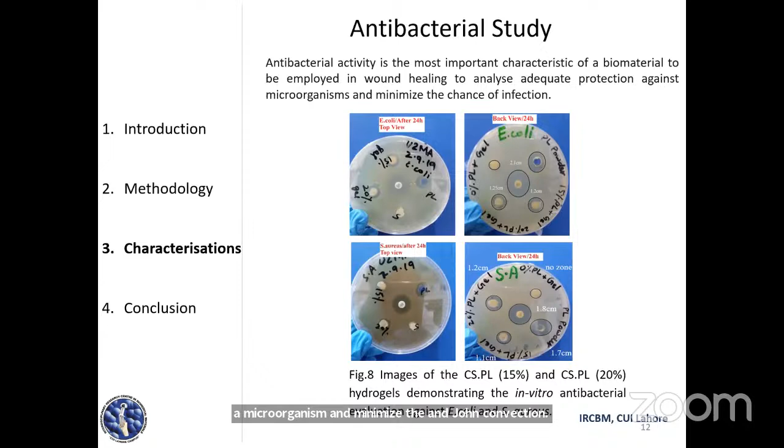This antibacterial activity was performed against 3 bacteria: E. coli, S. aureus, and MRSA, that is methicillin resistant Staphylococcus aureus, and it was done by the inhibition zone method.

All these bacterial strains were inoculated for 24 hours, and the optical density was settled till 0.1. These aggregates were prepared and streaked over to the plates, and samples were placed. After the placement of the sample, after 24 hours, these zones were measured in mm.

It has shown good zones against all 3 bacteria. In case of MRSA, a very resistant type of bacteria, even with this our active ingredient has shown a good zone of 14 and 14.5 mm. That means the drug is very effective, as well as the composite is also very effective against these bacteria.

This zone is because of both PL and CS chitosan. It has amino groups, and these positively charged amino groups bind with the negatively charged bacterial surface. They hinder the growth, decrease the synthesis of DNA, and cause cell death.

The same mechanism is shown by poly-L-lysine. They electrostatically bind with the surface of the bacterial membrane. The positive charge of the PL interacted with the negative charge of the lipopolysaccharides and proteins of the bacterial cell membrane. When these electrostatic interactions increase in number, the bacterial membrane structure got disturbed by the change in permeability of the membrane.

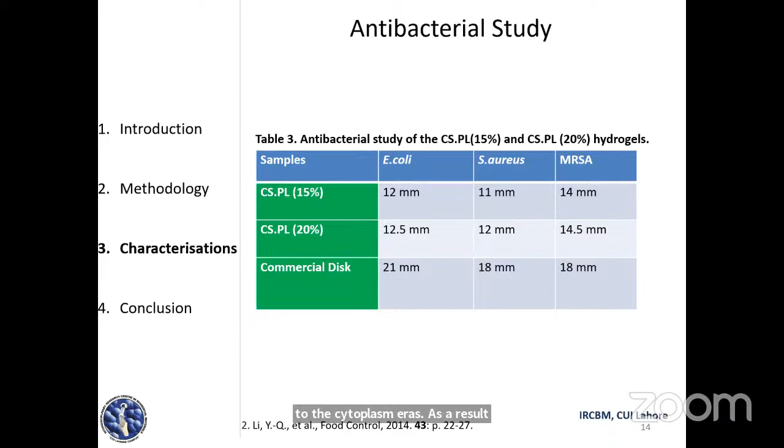These interactions interfere with essential nutrients getting inside the membrane to the cytoplasm. As a result, the bacterial membrane got fractured and the bacterial cell got damaged by PL.

Then we have contact angle measurement. Contact angle measurement provides information about the hydrophilicity of the hydrogel, which is considered the most suitable characteristic for the application. A small contact angle is considered suitable for hydrogel application.

A smaller angle will lead to better adhesion of the hydrogel to our cells, to the affected area, and it leads to better migration and proliferation. A good angle is considered between 40 to 90, and our composite has shown contact angle results within this range.

For the 15% hydrogel, it has shown a contact angle of 57.2, and the other with 20% hydrogel containing the active ingredient has shown a contact angle of 56.

And the last, we have a migration assay that tells us about the cytotoxicity of our sample. This assay was done with mouse fibroblast cells, and a scratch was made into the well, followed by the removal of the remaining cells, and media was added.

After 24 hours, the gap was filled with the cells. This means that the cells, having our media, it has promoted proliferation, and they got attached. The cells increased in number, and they moved and covered the remaining area.